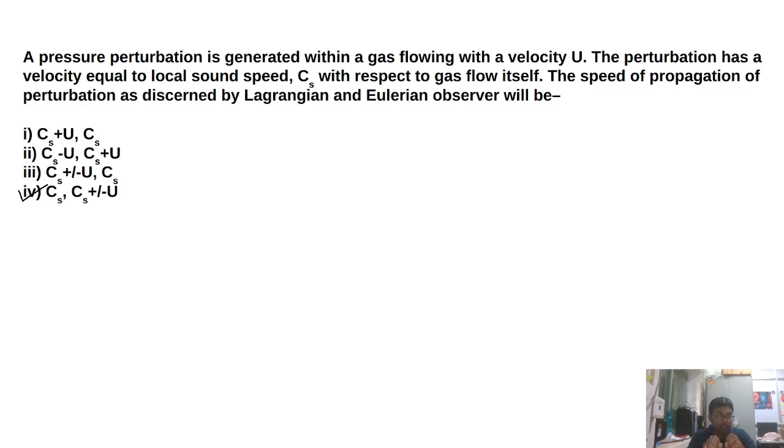Now depending upon the direction of cs and u, we could have plus or minus sign. If both are in the same direction, we find cs plus u. But if the flow is moving in the left direction and the perturbation in the right direction, we could find cs minus u. So the fourth option is the correct one. Now let's move on to the next question. Just a second, let me write down the answer also. Answer is 4.

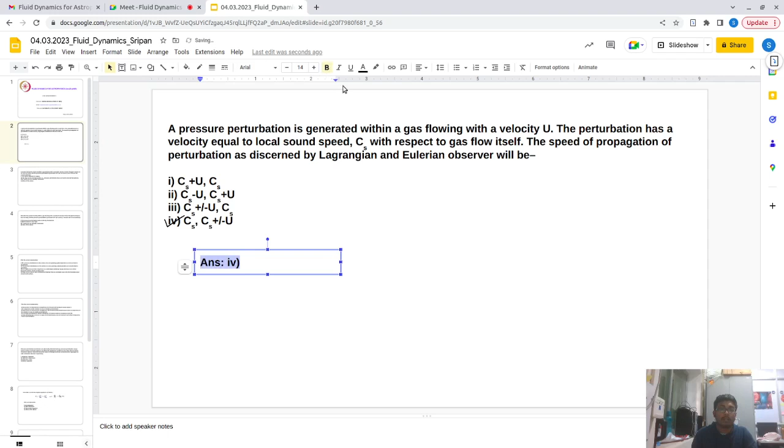Now the next question is, we have 2 points P and Q within a gas flowing with a constant velocity V. So some fluid is flowing with a velocity which is constant at each point, V. Let's say you have a P point here and a Q point here. These points are very close to each other, but still the pressure perturbation generated at P cannot reach Q ever. So choose the correct option. So initially you have a gas flowing and now you have a perturbation.

So the perturbation is also moving from one point to another point. So you have both the velocities: you have V, and you have some speed CS with which the pressure perturbation might move. Now the question is asking that if the 2 points are very much close to each other, then also this perturbation in P cannot affect the Q point. Now how can that happen?

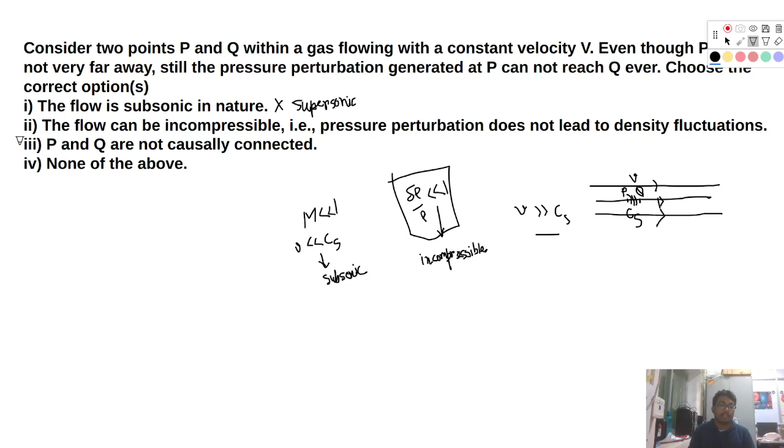Okay, now the third option is correct, as Sumit was suggesting: the propagation velocity of this pressure perturbation is not sufficient enough to reach Q, since Q has moved to another point in that particular time, right? So P and Q are not causally connected. This one will be a correct option. So yeah, Sumit was correct. So let me write the

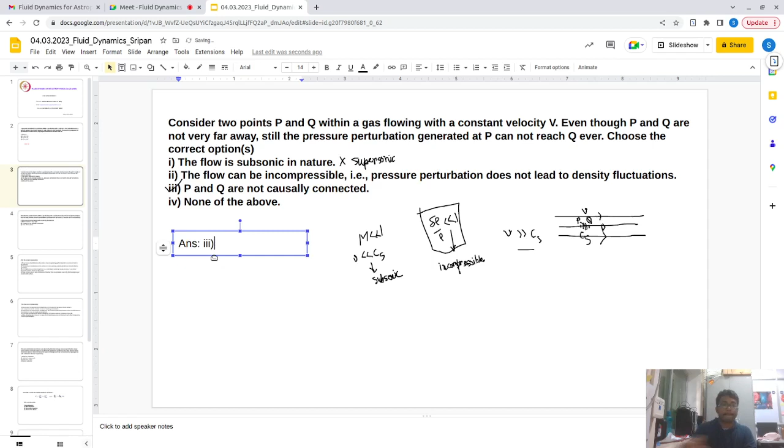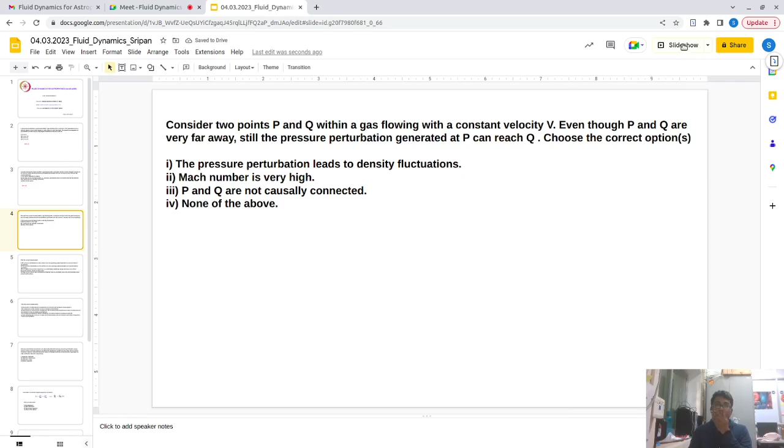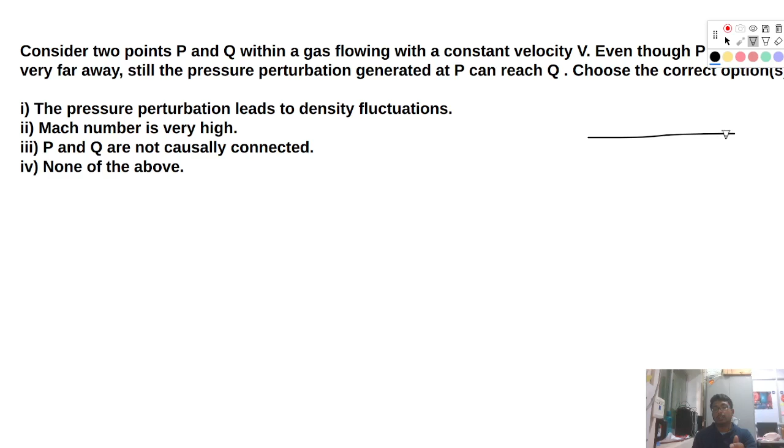Yeah. So now the next question is, consider 2 points p and q within a gas flowing with a constant velocity v as earlier. Now even though p and q are very far away... You have p and q, and this distance can be larger, I am just showing they may be at a large distance. Still the pressure perturbation generated at p can reach q.

Now if the pressure perturbation generated at p has to move to q, what will happen? The pressure perturbation will be moving with the sound speed cs, and p and q will move with some velocity v. If this pressure perturbation has to reach q, then cs has to be greater than v, right? So then what will be the nature of this flow? That will be subsonic. Subsonic, correct.

Now the first option is telling that the pressure perturbation leads to density fluctuation. Now if it is subsonic, just in the previous question we discussed that if it is subsonic, then it will be incompressible, right? Incompressible.

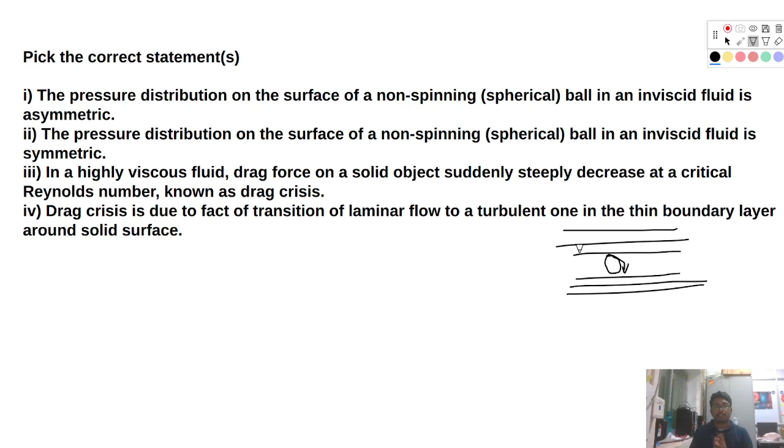So it is asking that the pressure distribution on the surface of a non-spinning ball in an inviscid fluid is asymmetric. Now you see, if you don't give any velocity like this, you are not imparting any spin. So what will happen? And the fluid is inviscid. As we discussed in previous classes, if it is inviscid, then it will have only one velocity component that is moving towards this, right? There should not be any velocity component in this normal direction, correct?

So we don't have any rotationality here, so the ball is not going to rotate if it is inviscid. If you don't impart any spin, then there is no external force to rotate the ball. Now if you don't have any velocity like this, the velocity in this layer and this layer will be the same, right? In general, if this is V2 and this is V1, you have V1 equals V2 here. Now if you consider Bernoulli's theorem, what will happen?

You have half rho V1 squared plus P1 equals half rho V2 squared plus P2. Now have a look here, V1 and V2 are the same, right? So P1 equals P2. So is it asymmetric? No, this is clearly symmetric, so this should not be a correct answer. Now the second statement is that the pressure distribution on the surface of a non-spinning ball in an inviscid fluid is symmetric. Obviously, as we discussed, this should be a correct answer, right, Sumit?

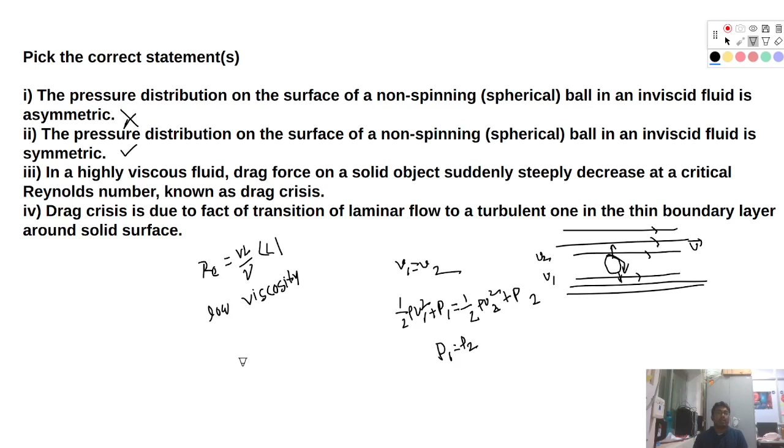So drag force on a solid object suddenly steeply decreases at a critical Reynolds number, known as drag crisis. Now if you remember, there is a plot like this of CD, the drag coefficient. There is some plot, like this and this one, and suddenly it drops, and then something like that. So the Reynolds number increases in this region, right?

So for low Reynolds number, as we found, this is low viscosity, sorry, this is high viscosity. Just a second, I have written a mistake here. This is high viscosity. So for high viscosity, the Reynolds number should be very low, and that is this regime, right? Now for this regime, you don't find any steep decrease. It is decreasing in a steady, gradual manner.

Now if you look at this point, right, there is a steep decrease. Suddenly it falls to some particular value, right? This is some critical point or critical Reynolds number at which the property of this drag coefficient is changing, right?

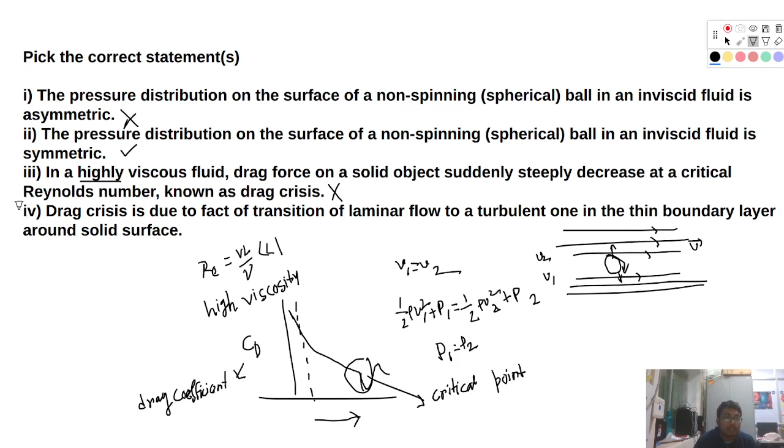So drag crisis has one of two reasons. One of these is this transition of laminar flow to a turbulent one in the thin boundary layer around the solid surface. So this is a low viscous fluid, so the streaking is not that prominent, but there should be some streaking. And in that thin boundary layer, you will find some turbulence, and that is the reason for this drag crisis, due to which the drag force suddenly decreases. So this fourth option is a correct one.

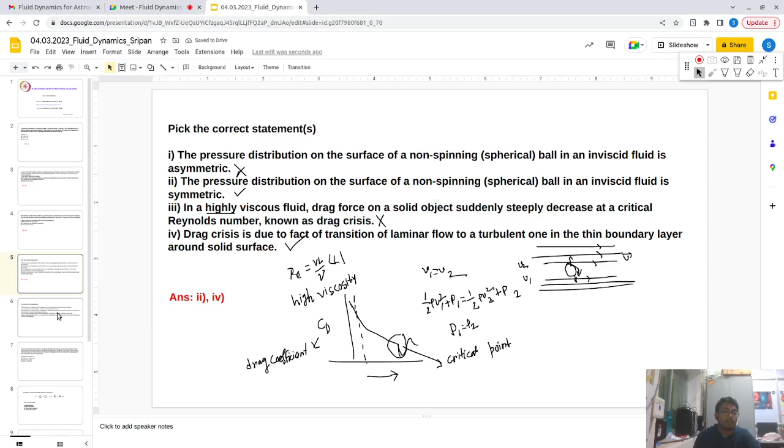Now the next question is, here again we have some statements, we need to find the correct statement. Intersection of characteristic straight lines for forward and backward waves leads to non-uniqueness of the solution in case of smaller perturbations. So we have many keywords here. Let us underline everything. That means whether the solution is a unique one or not in case of smaller perturbation. To have some waves we need some perturbation, right? And that perturbation is very small in its amplitude.

So first of all, what is the characteristic straight line? So we have t here and x here. Now there is an x equals CST graph, right? And you should also have another line like this, x equals minus CST. Now these are for forward and backward waves, and they are going to intersect at t equals 0, right?

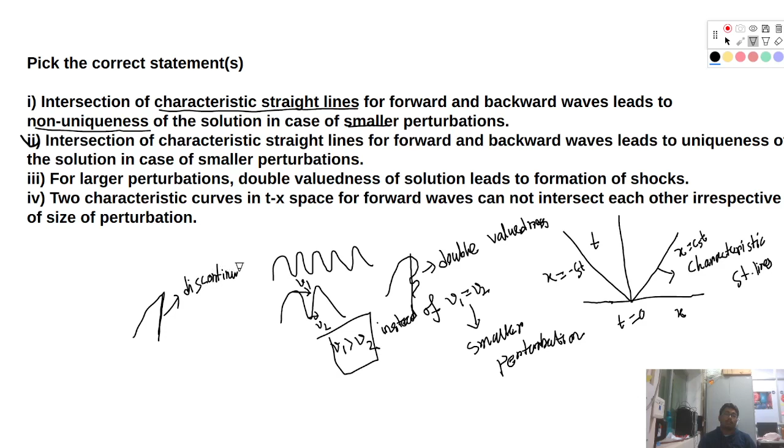Someone is writing something. Oh yeah, Ravi Shankar. V1 V2 will intersect. Yeah, that's true. So that should not happen, right? Okay.

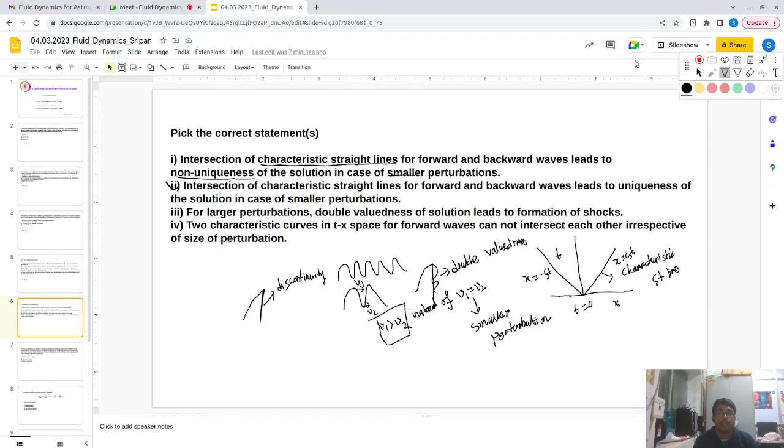So since that cannot be a possibility, because at a particular point you should have just one value of a velocity, and that should have a particular direction, you cannot have this double valuedness, so it forms a discontinuity, and therefore that will generate a shock, because shock is just a discontinuity across which there is a sudden drop of pressure as well as density, as well as basically there is a drop of velocity, right? So for larger perturbation, double valuedness of solution leads to formation of shocks.

That is true. Now the fourth option is two characteristic curves in Tx space, as we draw here, for forward waves cannot intersect each other irrespective of size of perturbation. Now tell me what is true about this. Ravi Shankar, Sumit. Number 4 is correct, I think. Why? Forward waves cannot intersect with each other. Okay.

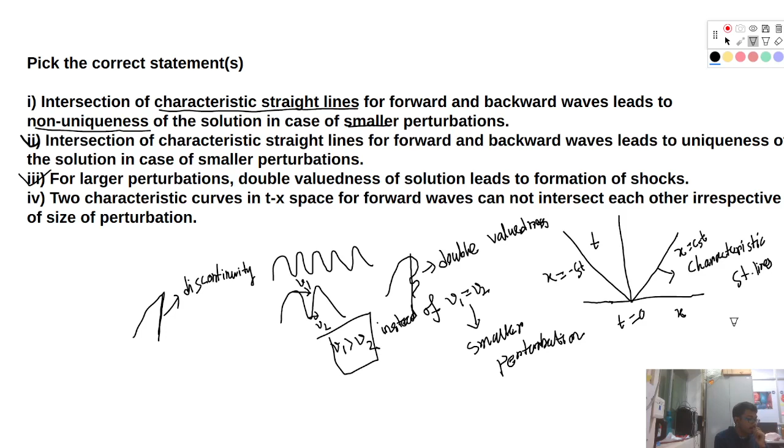Now, okay, fine. Ravi Shankar, do you have any comment? So writing something. Okay, so you are telling that two characteristic curves for forward waves cannot intersect with each other irrespective of size of perturbations. Okay. So you have a forward wave.

Okay, yeah, it's true. So in any case they cannot intersect with each other, irrespective of size of perturbation. Fine, so this may be the correct one. Fine. Now, okay, just a second. Okay.

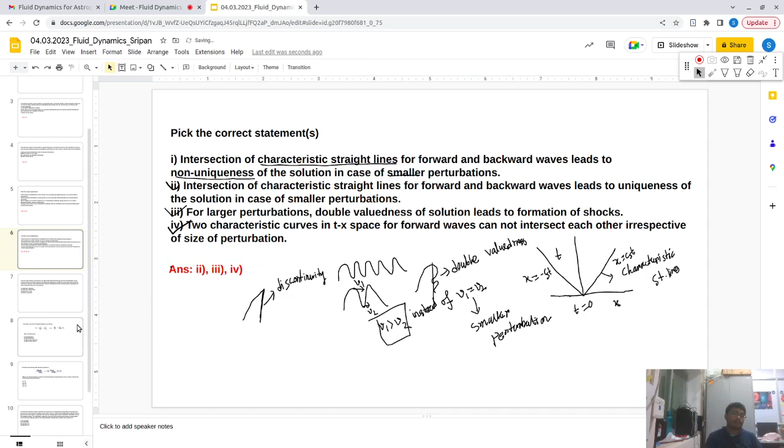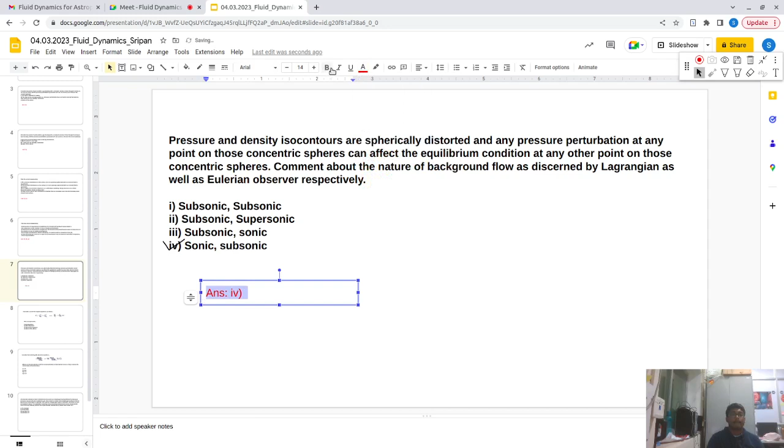Okay. Now the next question is, you have a set of coupled equations as follows. So which one is correct for this? Sumit, can you do it? Mm-hmm. Yeah, have a try.

I think it should be number 3 because heat equation and wave equation are both, I mean not 2D, I mean second order differential equations. But you have f1, you have f, right? So here you have a 1D equation for f1, and then you have an equation for f1 itself in terms of f, which already has some differentiation with that. So can it be transformed to a particular 2D equation here, right? Yes, got it. Exactly.

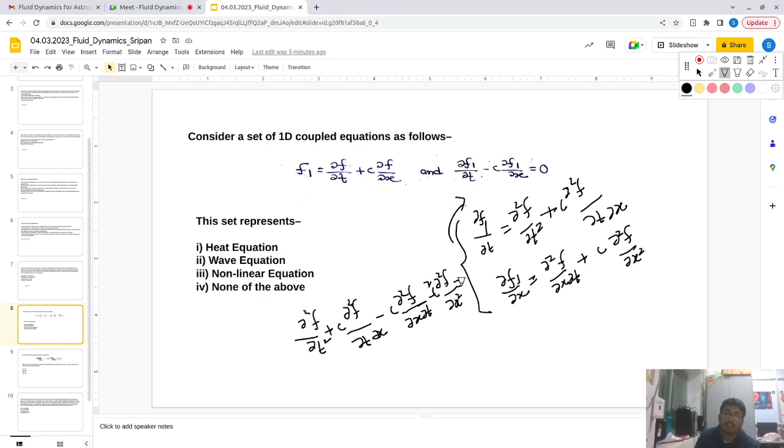Now these two terms will cancel out, right? Cancel out. Yes. So we are left with del 2f del t square, and if we just interchange the sides, it will be c square del square f del x square. Now this is the wave equation, right? Yes. Wave equation. So the second one is the correct answer. Okay. Second. So it is second.

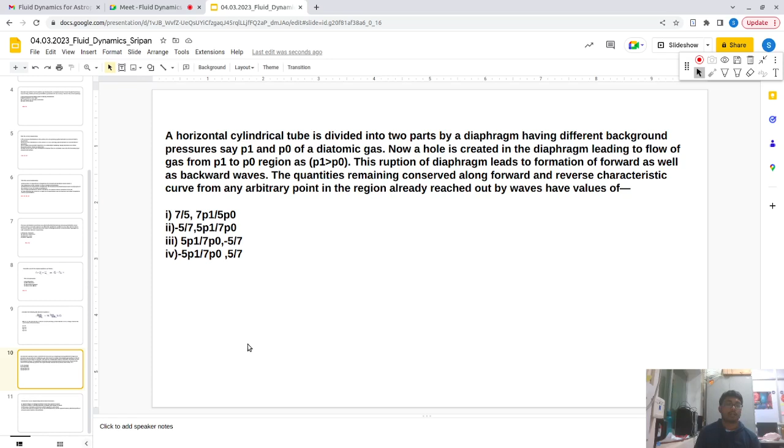Hello, sir. Yes. The screen is not visible there. Screen is not visible? No, I can see the screen. That's not a problem. Yes. It's okay, right? Yeah, so he is saying that this is non-linear equation. No, this is not non-linear. This is just the wave equation. And screen is visible, right? So my screen is visible? Yes, it is visible to me. Okay.

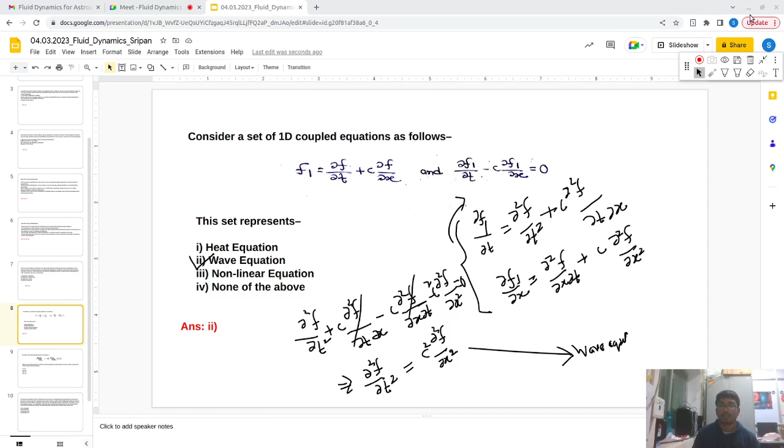So our next question is this one: consider the following 1D advection equation. We have del alpha del t minus u del alpha del x equals to 0. Alpha will be conserved along a characteristic curve a. Choose the correct form of function f(x, t). So we need alpha to be conserved along some characteristic curve given by a, right? So del alpha del a has to be 0 if it has to be conserved.

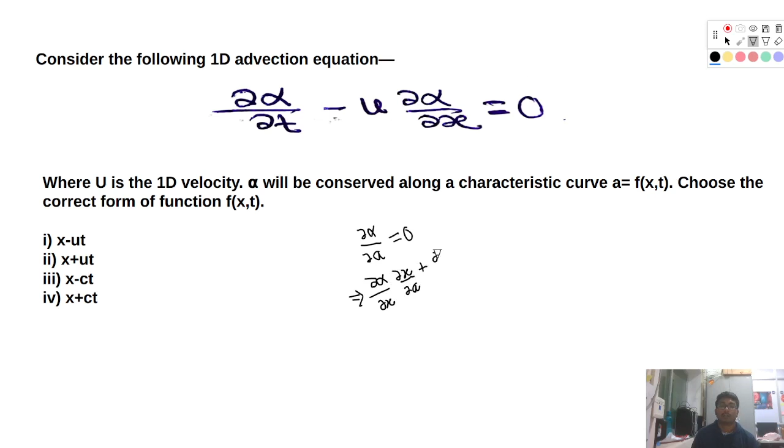So to do so, del alpha del a, right? Sorry, just a second. Now a is depending upon x and t. So I can write del alpha del x del x del a plus del alpha del t del t del a, and that has to be 0. Okay, now if we have this equation,

Hello, sir. Yes. Sir, this del alpha by del a equal to 0, which condition is it? See, if you have a particular quantity conserved along a certain characteristic curve given by some a, it means if you are moving along some curve a, alpha is conserved along that curve. Let's say you have some curve represented by a. If alpha is going to be conserved along this line, what does that mean? The line is depending upon this parameter a, right?

So if alpha has to be conserved along this line, we need some parameter depending upon which alpha can change, but we have just one parameter here, which is a. So if del alpha del a is itself 0, it is telling that alpha will be conserved. Whenever we consider conservation of something, there has to be some parameter on which alpha will depend. In these curves a is the only parameter, so if alpha is not depending upon a, it will not change; it will be conserved. Okay, hello. Oh, yes, sir. Okay.

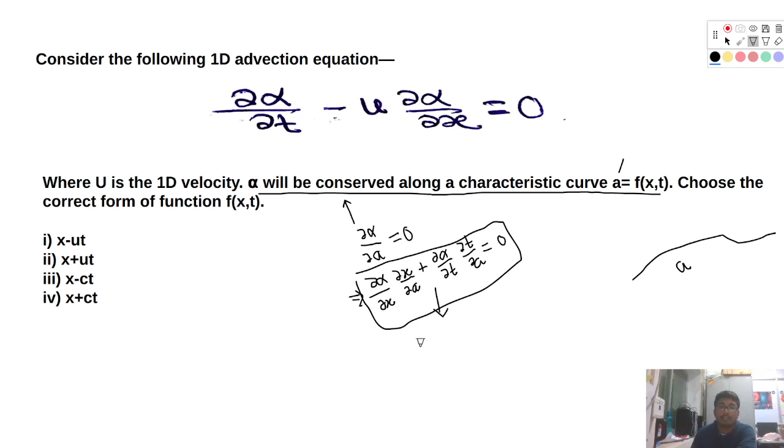Okay, so we have del alpha del x del x del a. Now if we compare this equation with the given equation, the given equation is minus u del alpha del x plus del alpha del t, and this is going to be 0. If we compare these two, we will find that del x del a equals minus u. This is one equation, number it a. Another is del t del a, that should be 1. This is equation b. Now using these two, x equals to minus a u, okay?

Or in the other way, what we can do is, just a second, yeah, so we can write it like this also: del a del x equals to minus 1 by u, okay? And now if we integrate this, a is minus 1 by u dx, right? This will be some integration, and also since a also depends upon t, we can consider an additional term which will be depending only upon t.

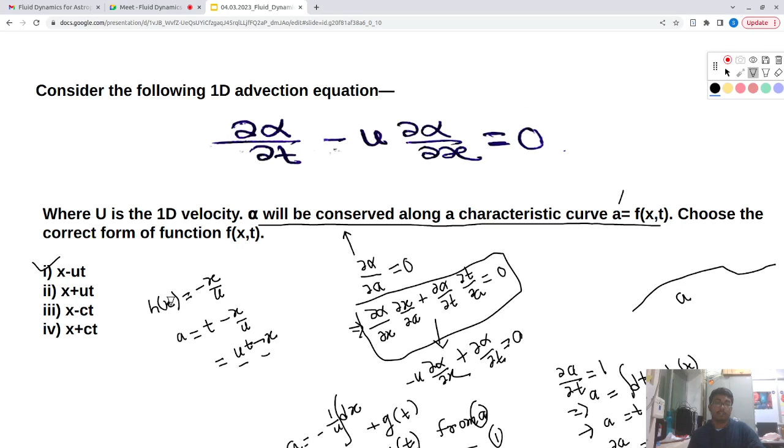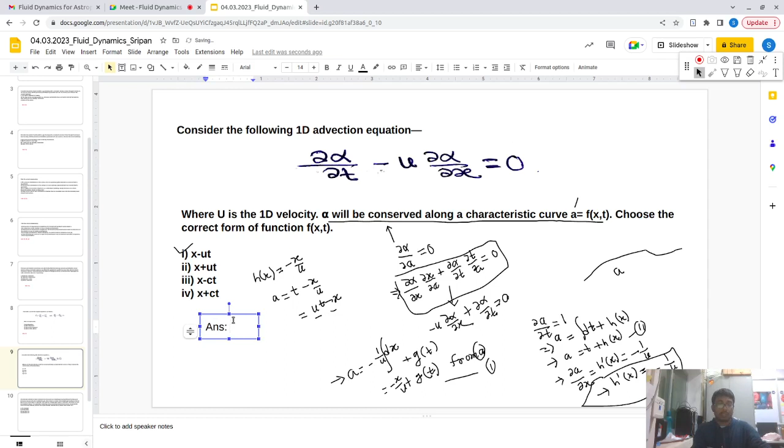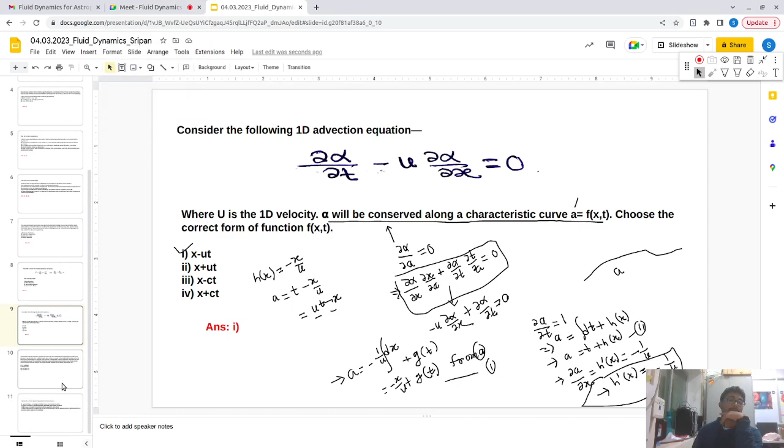Okay, so, sorry, fine. Sumit, any problem? No, that is okay. Yeah.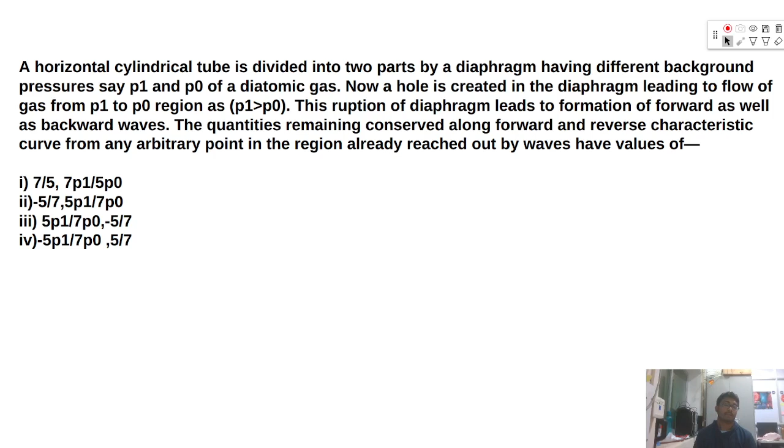So we have another problem here. A horizontal cylindrical tube is divided into two parts by a diaphragm having different background pressures, say P1 and P0, of a diatomic gas. Now a hole is created in the diaphragm leading to flow of gas from the P1 to the P0 region. So first of all, what we have is the cylindrical tube, and within that we have a diaphragm. Let's say there is a hole within the diaphragm.

So what will happen is here you have a P1, you have P0. So there is clearly a pressure difference, right? So as soon as there is a hole, there will be a flow from P1 to P0 direction, right? So this will be the thing. Now this rupture of diaphragm leads to formation of forward as well as backward waves.

So when you are creating some disturbance in this region, what will happen? There will be some generation of waves also. Now if there is a wave and there is nothing to restrict the propagation of the wave, then what will happen? The wave can go in either direction, right? It can go forward, it can go backward. The two possibilities are open for the perturbation to propagate.

So now the quantities remaining conserved along forward and reverse characteristic curves from any arbitrary point in the region already reached by waves have values of. So how do we calculate? First of all, if we try to find out the characteristic curve for this particular one, you have x and t, and the characteristic curve will look like x equals Cs t, and another one for reverse, x equals minus Cs t.

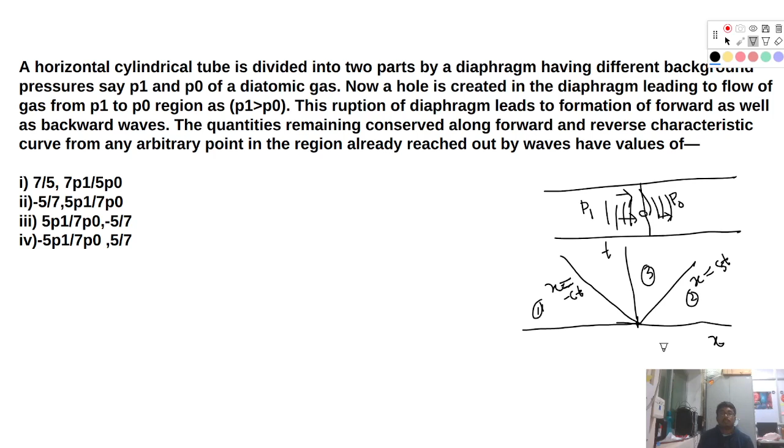Okay, so now what it tells is that we are considering a point where the wave has already reached. Now which region should we consider the point in? Can anyone tell me where I should pick a point? Let's say this is region one, this is region two, and this entire one within this cone is region 3. Why should I pick a point such that the wave has already reached there? That means they are causally connected. So which region should I take the point? Region 3. Yeah.

So for this region 3 you have... Sir, why not region 2? See, for region 2 you have a velocity of the flow which is higher than your propagation speed of perturbation. So if you have a higher flow, two points within the flow cannot be causally connected, because if you generate a perturbation at a particular point, it will go with some speed Cs, and the flow itself is moving at some velocity v which is higher than Cs. So as the perturbation is moving, the receiving point is also moving faster than the perturbation itself. So you cannot ever reach that point, right?

Yes sir, I'm getting it. So we cannot choose regions 1 or 2. We can only choose region 3. Now in each region we can consider forward and backward characteristic curves. How? We need to draw two lines which will be parallel to the forward and backward characteristic curves. So this one is your forward, because it is parallel to this one, and this is your backward.

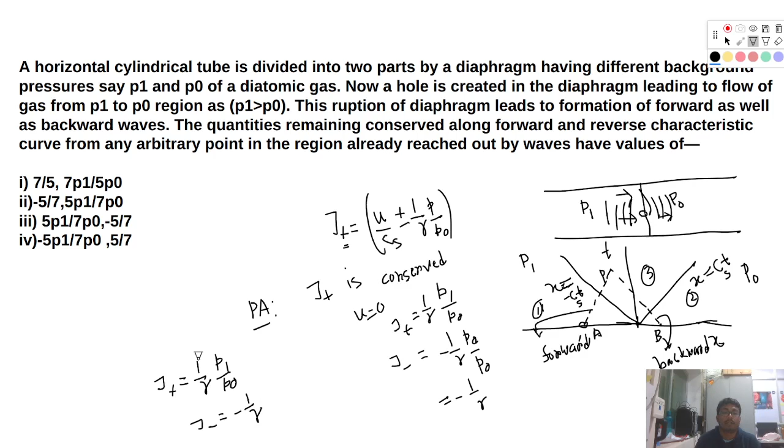Now we have two equations. First one is J plus is 1 by gamma P1 by P naught, right? Another one is J minus is minus 1 by gamma. Okay, now having this concept, can you answer this question? Which one of the options are correct? Another thing is here you don't know the gamma, right? But you know the gas we are considering is a diatomic gas. Now gamma is Cp by Cv. So you need to calculate the gamma for diatomic gas. If you know that, you know the answer.

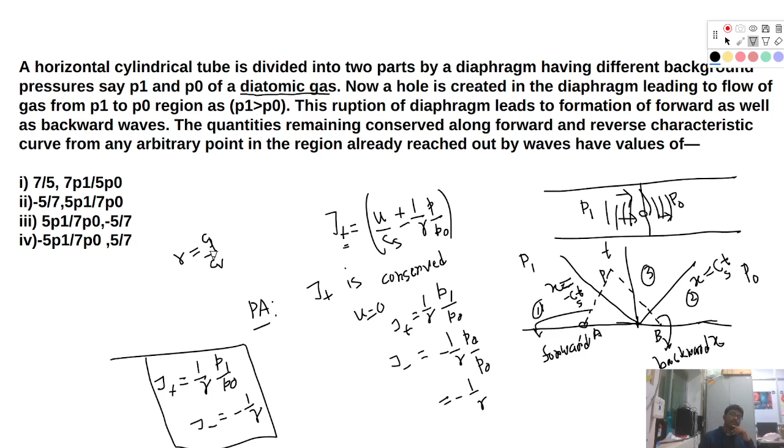Number 3. Number 3, 5P1 by 7P0 minus 5 by 7. Why? Because gamma is 7 by 5, right? Yeah. So this is true.

Anyone else is here? Yeah. So Ravi Shankar left the meeting. So okay. So here the answer is

Sir, here for diatomic, how did we calculate gamma? Okay. So you don't know how to calculate gamma. Hello. Oh, yes, sir. So tell me an example of a diatomic gas. Oxygen, O2. Yeah. So in oxygen what happens is there are two O, right, and they are connected by some bond in between them.

Okay. Now let's say we started with some free particle. And for generality we are considering 3D. So I have X, Y and Z. Now if this is the situation and you have a free particle, what will happen? At a certain time, to have the total idea about the particle's motion, you need to know X, Y, Z, each one of them, right? You need all of this information. So for a particle which is free, you need 3 coordinates.

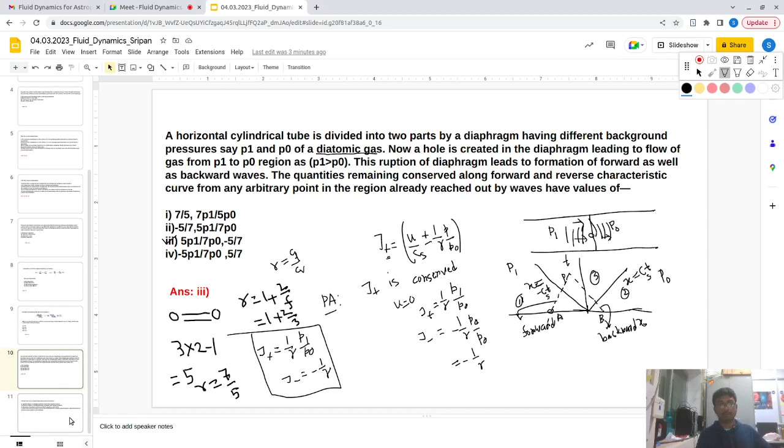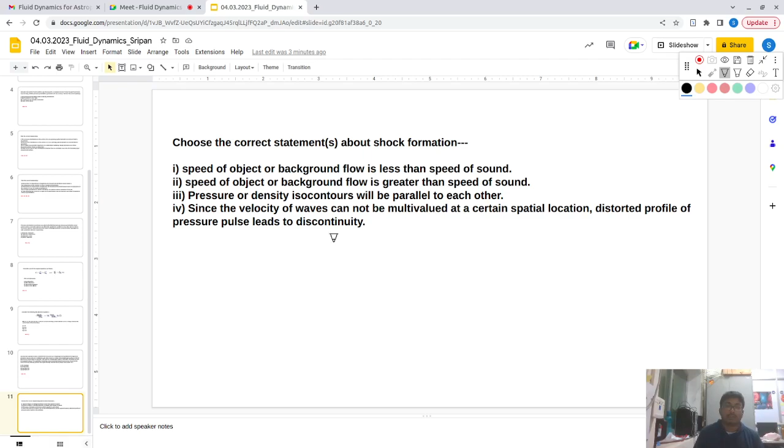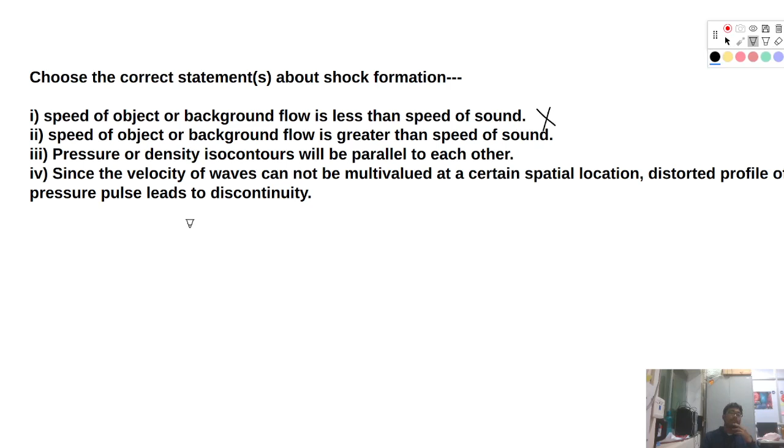Clear. So the next question is, choose the correct statement about the shock formation. So we have: speed of object or background flow is less than speed of sound. Let us go one by one. For shock formation, we need supersonic flows. For supersonic flows, the speed of object or background flow has to be greater than speed of sound, right? Then only it is supersonic. So the first one cannot be correct. Now, the speed of object or background flow is greater than speed of sound. So this is correct.

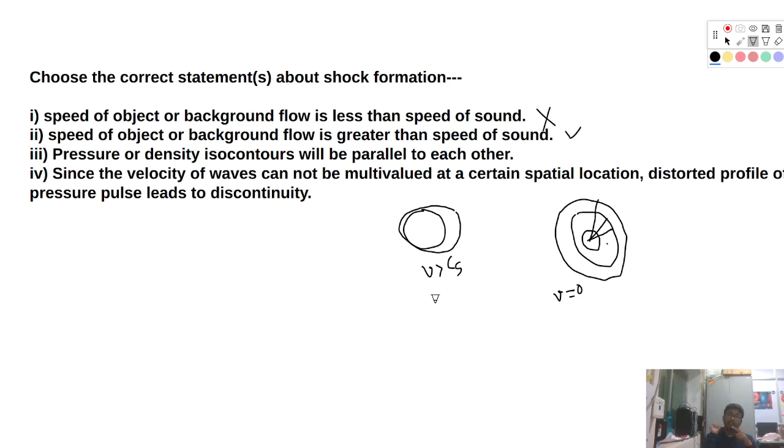Fine. So even if v is less than cs, there cannot be intersection between these isocontours, but still, if v has a certain positive or non-zero value, then these isocontours will not be parallel to each other. Intersection will happen only if v is greater than the sound speed. But if it is less than sound speed but greater than 0, then even if these isocontours are not intersecting, there will not be the symmetry or isotropy as I tried to show in this figure. This is not a good figure here.

So consider all of them parallel to each other when v equals 0, but when v is greater than 0 but less than cs, there has to be some non-isotropy or non-homogeneity in the isocontours, and they cannot be parallel to each other. So this will not be a correct answer. Sir, so for shock formation we won't get this symmetrical contour? We won't get it for shock formation.

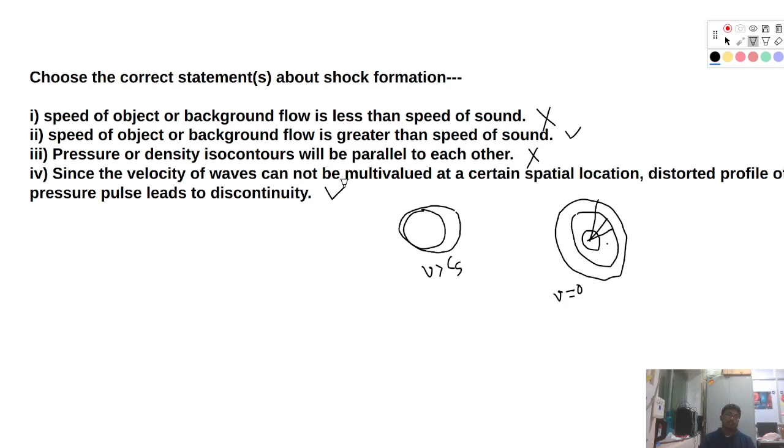Okay. So since the velocity of waves cannot be multi-valued at a certain spatial location, the distorted profile of the pressure pulse leads to discontinuity. This is again the same thing. So this is true, right? Because it would be multi-valued. So this should be the correct answer. So in that forward wave case in the first example, where V1 was greater than V2, that was also multi-valued, no? Yes, yes, multi-valued.